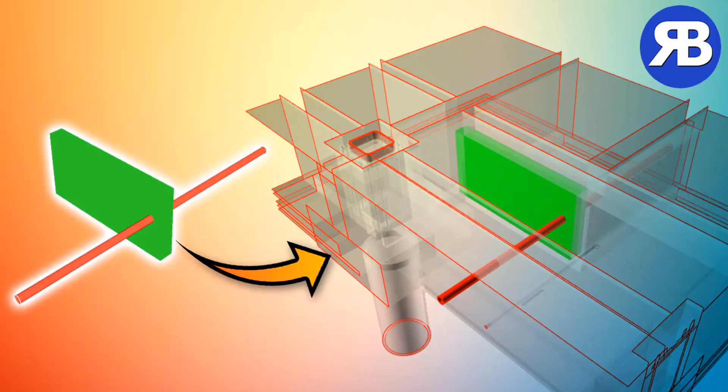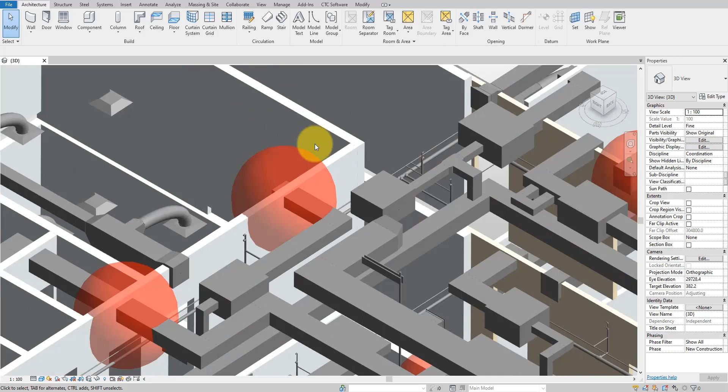Have you ever wanted to mark the location of clashes you found in Navisworks right here in Revit? For example, using these spheres where you can select them, see the clash name from Navisworks, and instantly understand where they are in the model. Well, I will show you today how to do this super quickly using Dynamo. This is what we will create together.

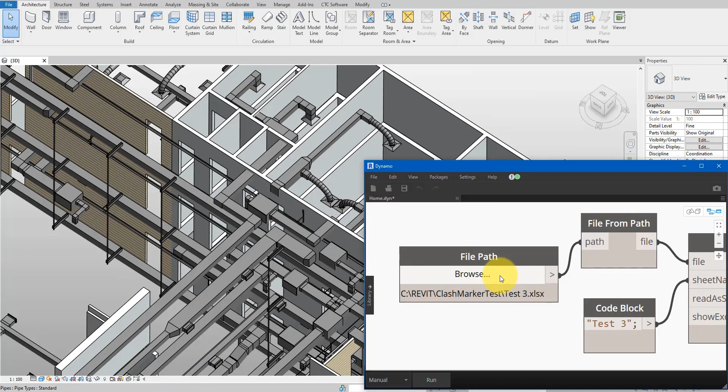For example, I will delete these spheres for now. Go back to Dynamo. Make sure we have the clash reports from Navisworks selected here and run the script. And just after 1 second, I have all those clash markers automatically generated for me. For example, let's pick one of them. Maybe this one here at the end.

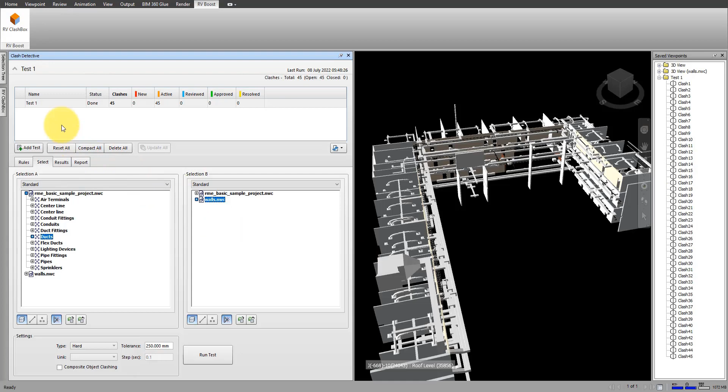This is clash 1. When I go back to the Navisworks model for this project, when I go to the test, go to result, select clash 1. That's the same clash we are seeing now in Revit. To double check this, I can also go to Revit again, back to Dynamo, and then use another script we have for writing XYZ coordinates to the object.

In this case, I have the X, Y, and Z parameters for this marker, but they are empty for now. Let's run this. And now you have their coordinates filled in automatically. If I now return to Excel, and then check out clash number 1, this one here on the top row, I can see straight away these are the same coordinates, so the whole thing works.

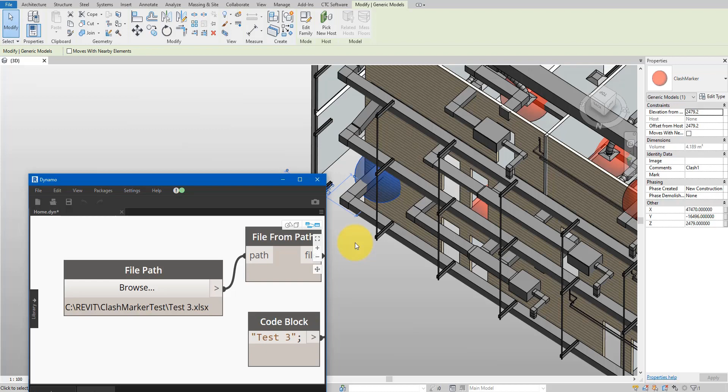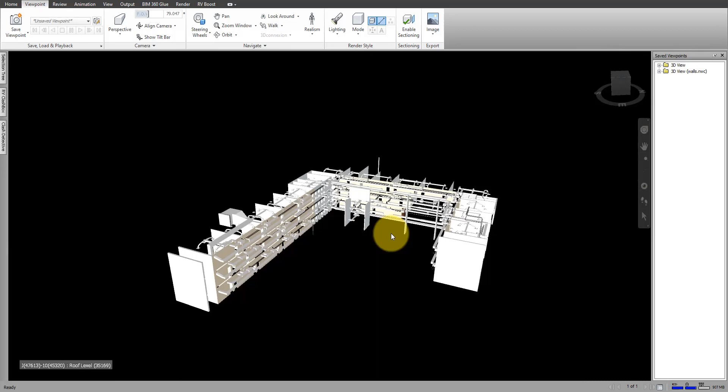Okay, let's begin. We have here the same Revit model from before, which contains MEP elements like ducts and pipes here, along with architectural walls. So now let's see those clashes between ducts, for example, and walls in Navisworks. If I open Navisworks now, you will see the same model in here, and these are the same objects. Let's now run a clash test. Let's go to Clash Detective.

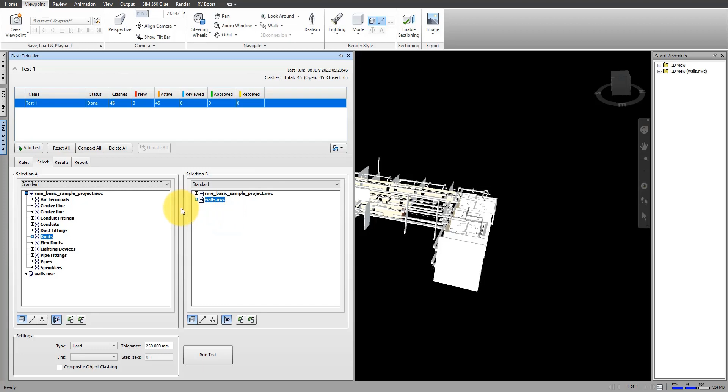I have set up Test 1 already, and this one will clash all the ducts to all the walls. Of course, I exported the walls separately. That's why you see here all the walls are in this one single NWC, and all the MEP elements are in the other NWC up here. Alright, let's run this test. And you can see now it has produced 45 clashes for us. Let's see them in the context of this model. So we have here one of them, another one here, another one there.

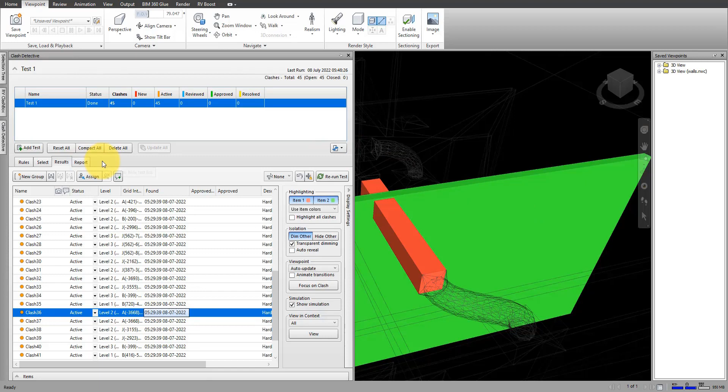Now let's see those clashes in Revit. Firstly, you need to export from Navisworks the clash report. So let's make sure you select the right clash test there and go to report. Now choose the format to be HTML tabular. And in this case, I will export the current test, but feel free to do more, like all tests there if you have time for it. For now, let's do one.

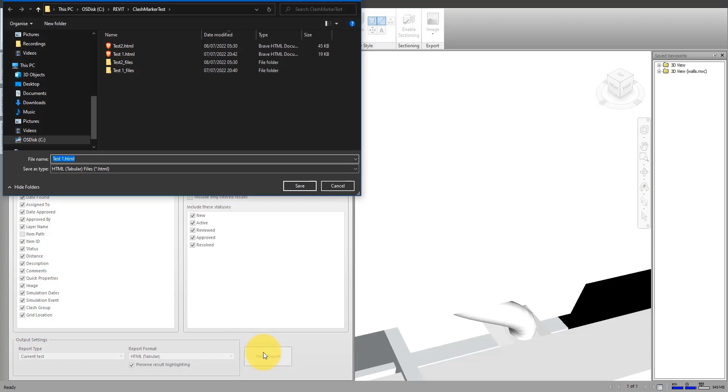Let's choose write report. And you have seen I've done a few tests there already. Let's call this one test number 3 and save it here. Okay, that was quick. I will now open the report in Excel. If you haven't opened Excel yet, now is a good time to do it. Just open a blank spreadsheet like this, and then go to the folder that we exported the report to, select it, and drag it into Excel. So even though that's an HTML file, Excel can read it just fine.

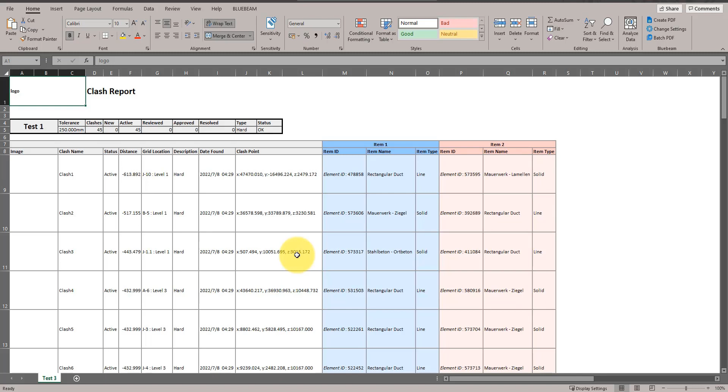In here, there is a lot of information, but for now we just care about two things. Firstly, the coordinates in X, Y, and Z of the clash points, and also the clash name, because in Revit, this will help us identify the Navisworks clash later on more easily. Make sure you know the unit of these coordinate values.

For example, if I go back to Navisworks quickly, as you can see this model here, when I go to Options, Model, or actually Interface, I can select the display unit, and that's now showing as millimeters. So that's how I know these coordinates should be in millimeters as well. All right, let's open Dynamo and start scripting. I will go back to Revit.

Open up Dynamo here. I've already done that for you. Let's now make a new definition. Firstly, of course, change the run mode to manual. And now we can start adding some first nodes. Let's start by bringing in the information from Excel.

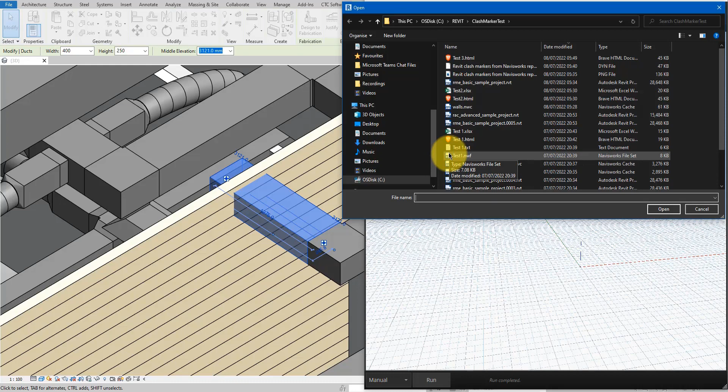So I would type File Path. Click here, select the Excel file in the window, and then open it. Moving on, we can do File From Path. Connect it here to get the file. And then, of course, we should do Read Excel or Import Excel. Get the file to there.

It needs to have a sheet name as an input. So let's see what we should give it. In this case, I will just copy this text down there, which is test3. Go here, define that as a string, and connect it to sheet name. We can now run this. And very quickly, you can see now we have all the information from Excel.

But that's a lot of noise, so let's filter out just the coordinates and the clash names. We can do GetItemAtIndex without a space. The data will be going to list, and now we need to know the index of the column for coordinates. Super easy. I normally just go to Excel and type in a few numbers starting from 0, 1, 2. I can now drag this over so I get the right column indexes. So now as we can see, this column here for clash point coordinates is at index 9.

Let's go back to Dynamo and define the column index like this. When I run this, you will see the index has given me all these coordinate values. Or has it? We actually forgot one step. We should go to list here and use levels. Let's try with level 2. Okay, now that's more like it. We have coordinates back. However, these are not only coordinates. We also have empty cells and cells for titles or text.

Let's filter them out. Firstly, let's clean up the null values. So let's do IsNull. Get them to here. And then we do a Boolean mask like this. Connect to there, and then use the mask to filter out for the coordinates only. If I expand this, you will see the in list is what we don't need because these are nulls. We need values from the out list. However, in the out list, I still have text. So let's remove them as well.

Let's do String.StartsWith. Get the out values to string. And now we need to search for the prefix we want the valid strings to have. In this case, the prefix will be x and then colon, because that will begin a valid coordinate string. So I can now do x colon, search for that text here, and run it. Now we have a list of trues and falses.

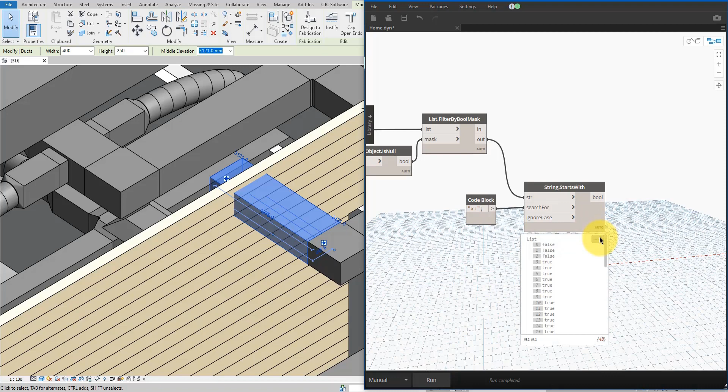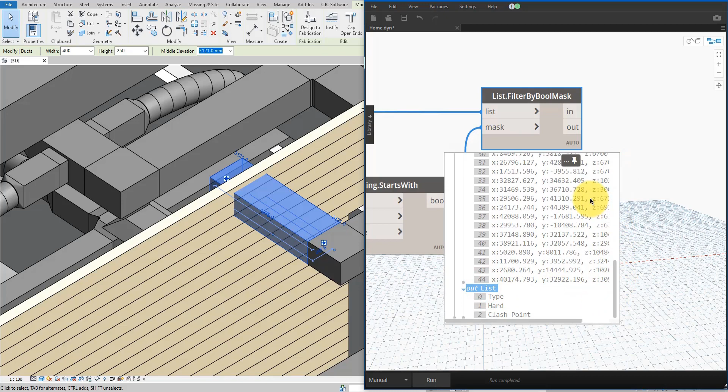Let's do another Boolean mask here. Connect the out list to list and use this new mask. Run this again. And you can see now in the in list, that's exactly what we need, all the coordinates as strings. We can now discard the out list, so everything works to this point. Next thing to get from Excel will be the list of clash names. So going back to here, we need to get the clash names.

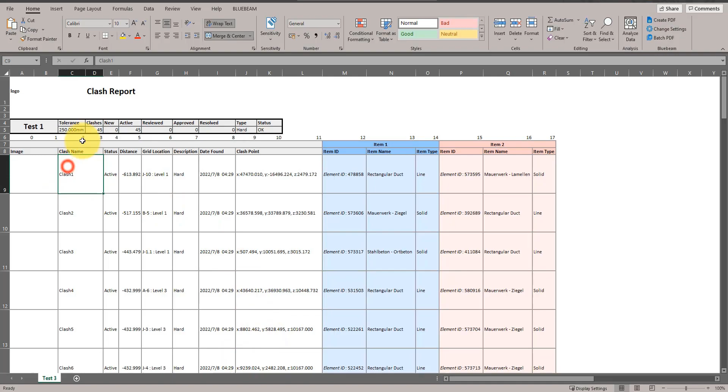Let's do another GetItemAtIndex. Paste it here. And what's the index of the clash name column? Let's check. That will be index 2. So we know what to do now. Change the number here to 2. Run this. And yes, these are clash names. Now we need to filter this list using the same Boolean mask up here that we did for the coordinates. Super easy. I can just copy this node down, change the list of input items, run it, and now we have all the null values filtered out for us.

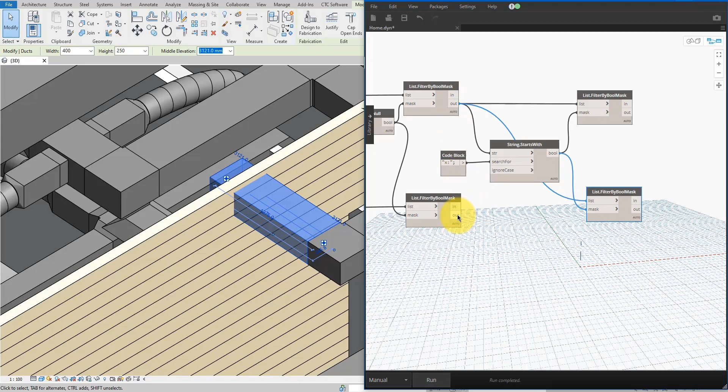Let's now do the second mask here. Copy this down, and use the out list, just like what we have up there. Use the out list, not in. And now if I run this, I will get all the clash names that are valid.

For now, I will just turn off the background grid there. That bothers me a little. Let's move it down here so I don't see it anymore. And now we're good to go.

The next step is to obtain the individual x, y, and z coordinates from this string. We know they are the right data, but they are not yet in the right format. So let's change that. Let's firstly do ToNumber. So we are converting all those strings to numbers, like this. Actually, before doing that, we need to split it first. So let's do String.Split.

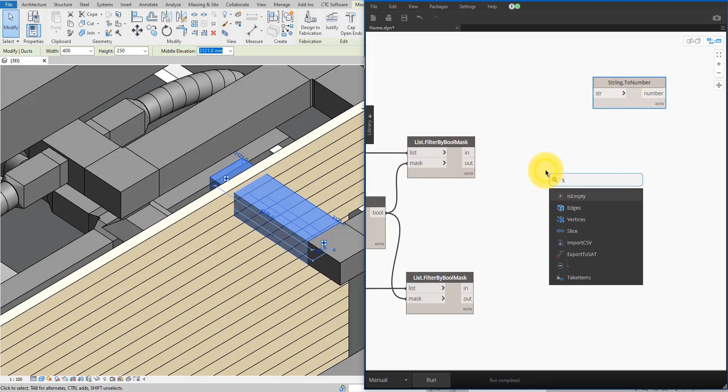Okay. Now for the separator, we can define 3 of them. So let's do additional inputs. And now the first separator will be x. Next one is y. And then we have z, all followed by the colon. And now that will be separator 0, 1, and 2. Let's see what we get.

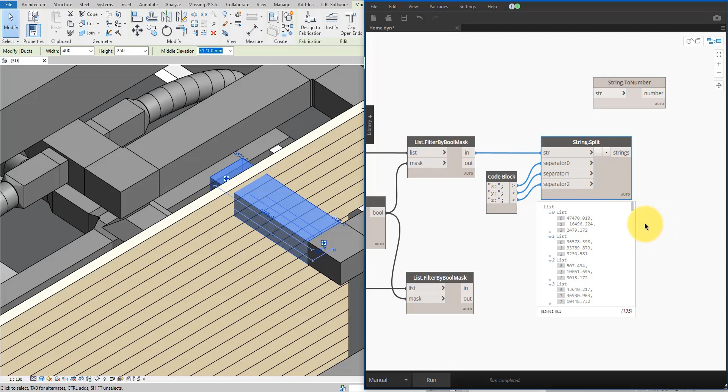Okay, that looks fine. We can now have x, y, and z for each clash. Even though they still have the comma at the end of the coordinates, let's change that. Let's add the comma here and the comma there. Try this again. Now that looks good.

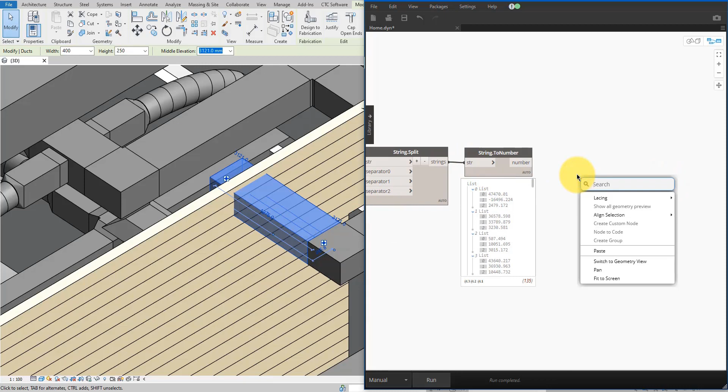It's time for us now to convert these strings to numbers. Let's see if that succeeds. Yes, it does. Now we have all these numbers looking very similar to the strings, but now they are of the right data type. Next step, we don't want to create the clash markers individually, so let's transpose this list. Let's do transpose, like so. And then you will see what it does.

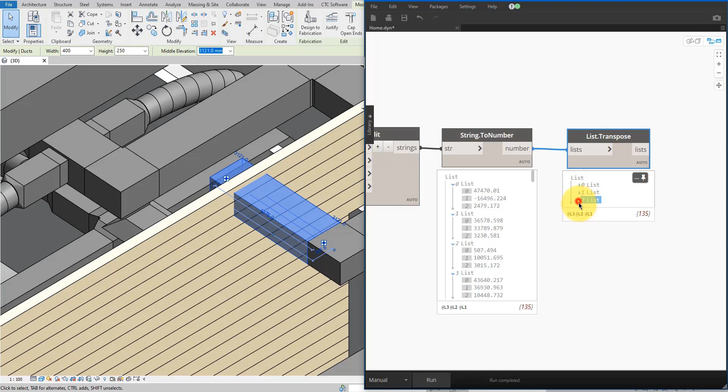It collects all the x values from these sublists into the first item here, which is list 0 for x values. Then you have the same for y values in the second list. And then the last list is for the z values. So that's really good. Now I want to explode these 3 lists into individual inputs to my next node.

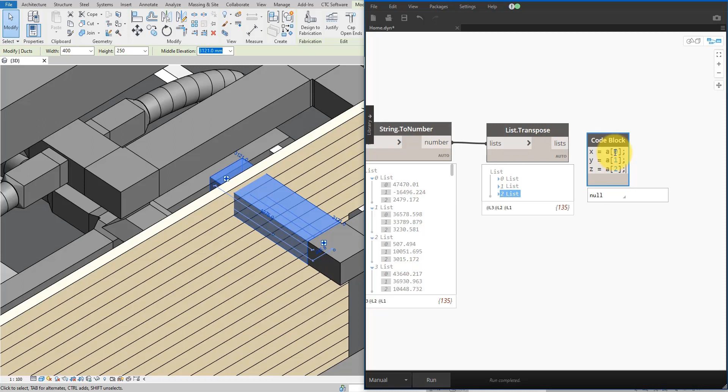So let's do a quick code block here. So let's say x is list a at index 0, y is list a at index 1, and z will be also list a but at index 2. Just a way for us to get the x, y, and z lists as individual items. So now I have preview here just the z list, but we know that x and y have also worked.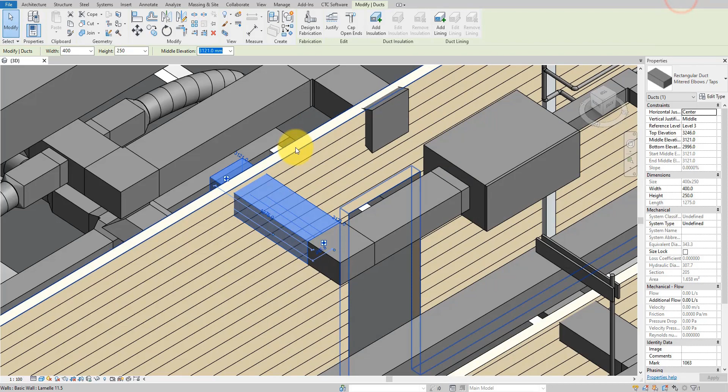Alright, moving on, we need to ensure one thing exists in the Revit model. It has to have the clash marker family. If you remember, that's the red sphere that we copied around to show the clashes locations. I have already loaded it into here. So let's see if I go to component. That's the clash marker there.

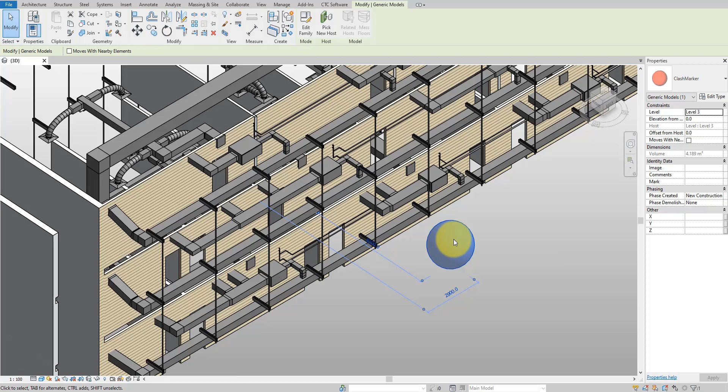This is from an external family I have loaded into the model, but don't worry, if you haven't got something you can use, just follow a link in this video description to download this family and then use it straight away. Essentially, it's nothing more than just a solid sphere with a red transparent material. So we can still see everything behind it, like this. Okay, let's make a note now of its family name. The family name is ClashMarker.

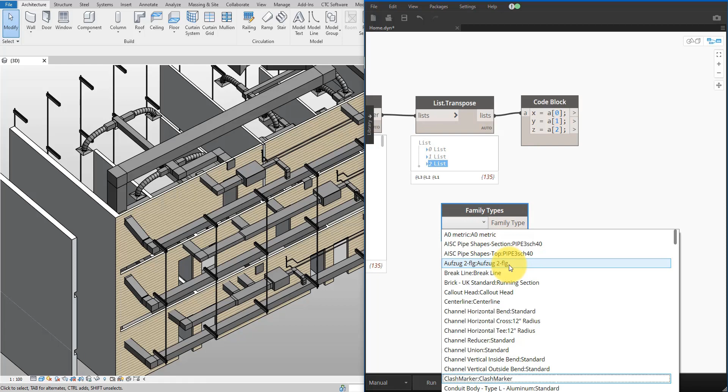So we can now go back to Dynamo and define the family type here using family types. This is an input node where you can select ClashMarker from the list. It's there. If you don't see the name ClashMarker or the name of your custom family you want to use, make sure the family is loaded into the model. Otherwise, the name here wouldn't show up.

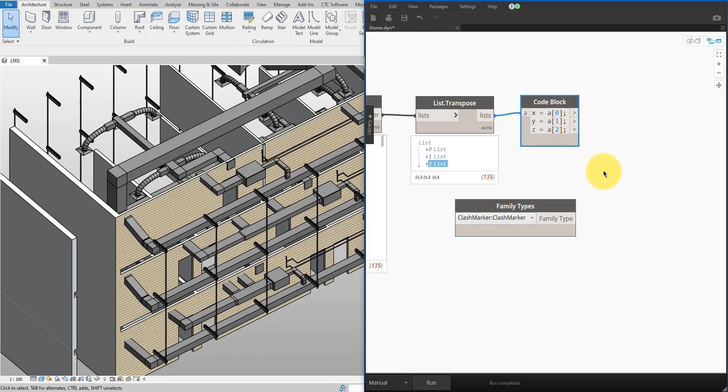Alright, so at this point, we have all the inputs we need for the next step. We have the coordinates of the clashes. We have the family we want to use to mark them in Revit. And also we have the clash names coming out from this node there. Now, to start placing the markers, we can use a bit of Python to make the process as efficient as possible. Let's drop in here a Python script node.

For now, I will do Python script from string. And now we give it a few inputs. So let's do for x, y, and z, followed by the family type. Now, it's the usual thing I normally do in my tutorials. Let's make now a way for Dynamo to read a text file that contains a Python script. We can then use the text from that file as a script input for this node here, and then it will just run the Python script that we have in the text file.

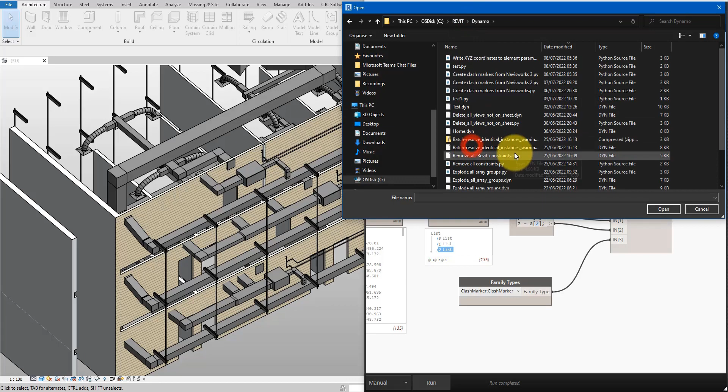All right, let's start giving this Python script node here the script file that it needs. Let's do another file path node, and then select a Python script file I will use just in a minute. That is called test.py. And then similarly to before, we can do file from path. But this time, instead of read Excel, we just do read file as text. That will give us a string. I can now connect the string to here.

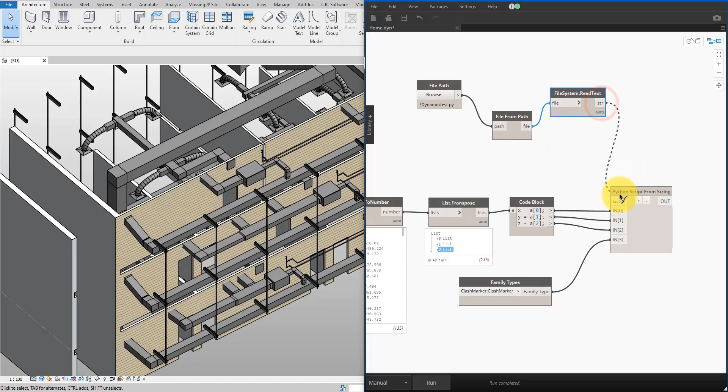And now the next step, we will go into Visual Studio Code, my favorite Python script editor for Dynamo. If you are new to this kind of workflow, don't worry. Just go down to this video description and use a link there to see my basic video tutorial on how to script things in Dynamo this way.

It will also show you how to set up and use Visual Studio Code, because this is really the best editor you can have for writing Python script to use later in Dynamo. The video will also show you step by step how to create, understand and use this Python script template that I have opened already. So that should give you all the information you need to then come back to this video and follow me from here. Okay, let's start scripting here.

To begin, we need to get the project location from the active model. So let's call this one project location and say that should be doc.ActiveProjectLocation. Next thing to do, we need to get the position of the internal Revit origin point in this shared coordinate system, which is what this command returns here. It returns the current active shared coordinate system being used in your Revit model.

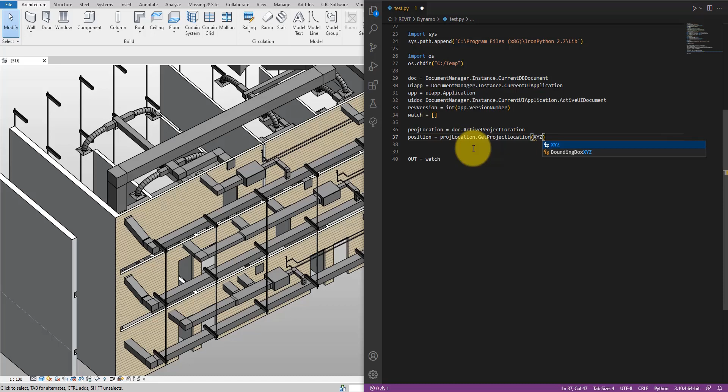So to get the position of the Revit origin point in this shared coordinate system, we should call position equals project location dot GetProjectPosition, and the origin point will be at XYZ.Zero. Let me show you what that means.

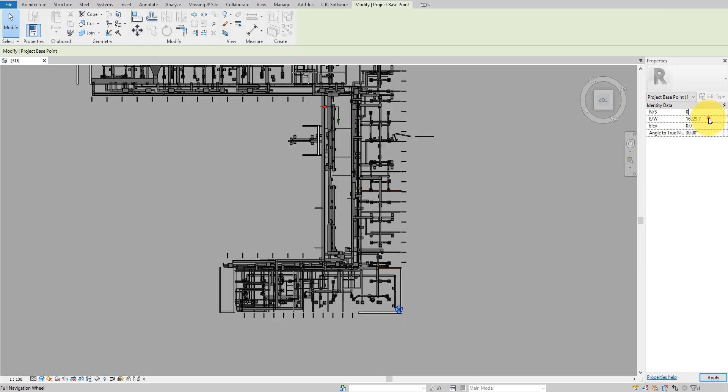If I now go back here and then turn on site components, which are project base points and internal origin point, let's see where they are. Okay, so this one is actually not overlapping the internal origin, which is there. Let me move it there. Let me change these two values to 0 and 0. And now you see actually the origin point in this case is not where the model origin point is.

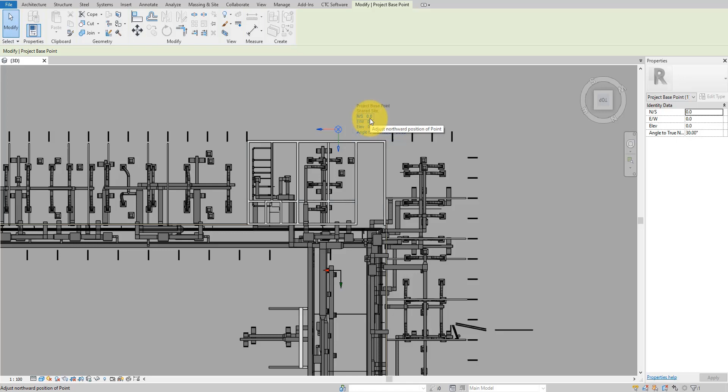As you can see over here, we have the Revit model 0,0,0 origin point. This 0,0,0 point is different. This is the origin point of the shared coordinate system. So now if I try instead to move this point to where the model origin point is, you can see now it has some x and y coordinate values. And these values are the ones we are trying to get using this command here.

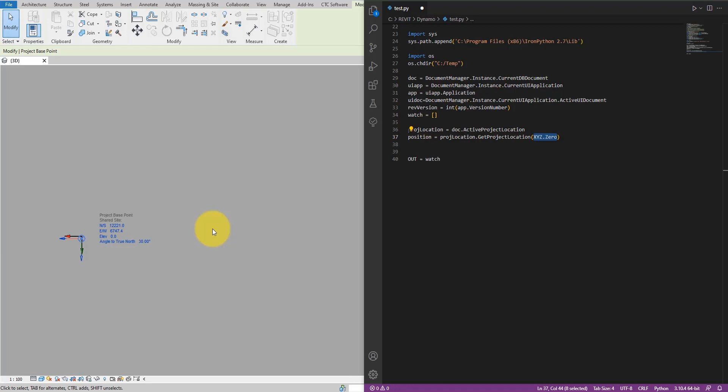Essentially, we are saying, yes, we understand that the Revit origin point, which is XYZ 0,0,0, will have all three coordinates equal to 0 in the context of this Revit modeling space alone. However, a shared coordinate system, especially once you have set it up to connect different Revit files and Revit links, has a different origin point. And we saw that point previously when I tried to move the base point to 0, 0 by changing the northern and eastern coordinates here. We saw clearly it's not the same point as the origin point.

So here we are trying to get the coordinates of the Revit modeling space origin point in the shared coordinate system. You will see in a minute why we need it, but that's the first step we need to do here. Okay, next step, let's bring in the inputs from Dynamo into Python. So let's see what we have here. We have X, Y, and Z as input 0, 1, and 2. Let's define that here now.

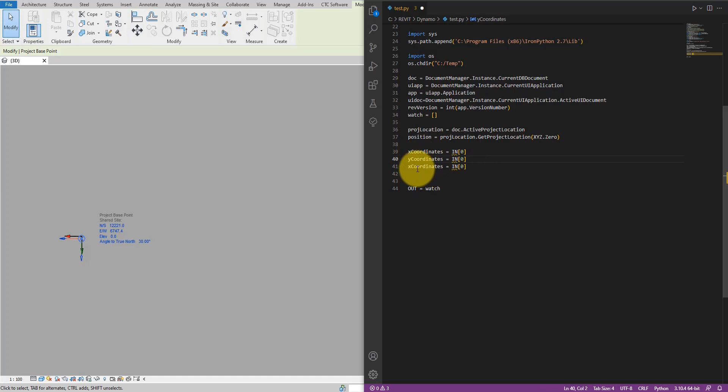We can say X coordinates equals to IN[0]. And then if I do the same for Y and Z, I should then change the number here to 1 and 2. The next input we have was family type. So let's say fam type should be input number 3, exactly as it shows in the Dynamo graph.

However, with family type, we need to do something extra. We need to call UnwrapElement and it will convert a Dynamo object into a Revit object. We need the family type to be a pure Revit object so we can use it later on in creating the clash marker instances. Whereas if we just use IN alone, that won't work because IN is actually the Dynamo wrapper around the actual pure Revit family type object.

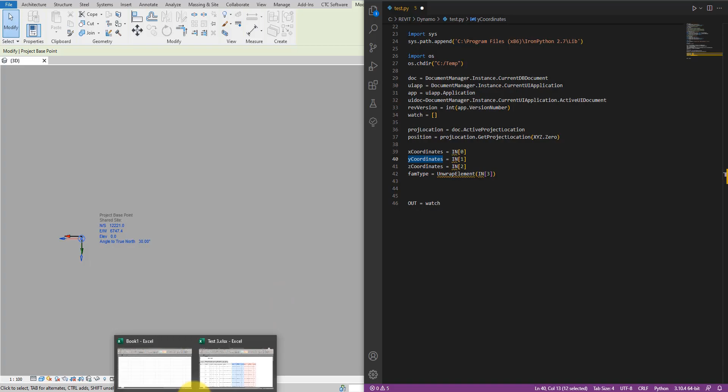Next step, we need a way to convert the X, Y, and Z coordinates here from millimeters to Revit internal units. Remember, we got the coordinates from Excel and we checked in Navisworks that these are millimeter values. That's fine to see in meetings and Revit windows, but for using them to create Revit objects, we need to use the internal Revit unit system. So now we need to have a way to convert these values to feet and inches. The good news is I have defined that function for you already. So let me just paste it here.

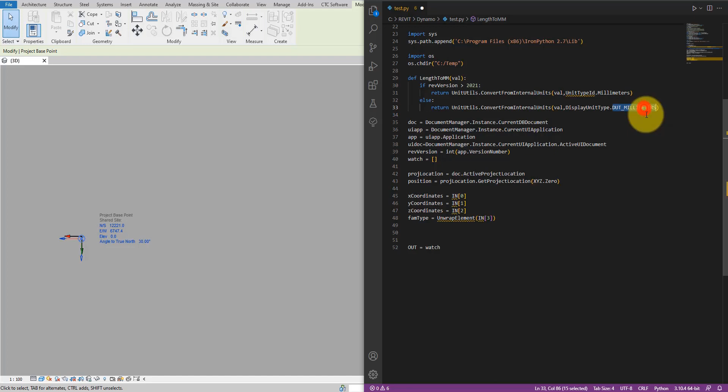Essentially, this function is called length to millimeter, and it simply checks the Revit version. If it's greater than Revit version 2021, then it's going to use this method for converting the value from millimeters to the internal unit. Otherwise, it will use an older unit conversion method in the Revit versions before 2021, but still it does the same thing of converting millimeter values to the internal unit value. So with that definition in place, I can now go down here and say I want to have X values. This will be in the internal unit.

And I can say length from millimeters. Actually, this name is wrong. Let me change it first. Well, that reminds me that this method needs to have a counterpart. So instead of converting from internal unit to millimeter, I actually need to go the other way around. So let's say from millimeter there. This method will convert from millimeter to internal unit. And this one will convert from internal unit to millimeter. Very easy to get confused there.

But anyway, with this one, we can say convert to internal units. And the same here. Okay, and now I can call length from mm down here on the value. And that value will be from X coordinates. So here we have a quick way to construct a for loop. We're looping through value in the X coordinates list up there. And for each value, we convert that into the internal unit from millimeter to internal. Let's do the same now for Y and then Z. Make sure to change the name here at the end too to Y and Z coordinates.

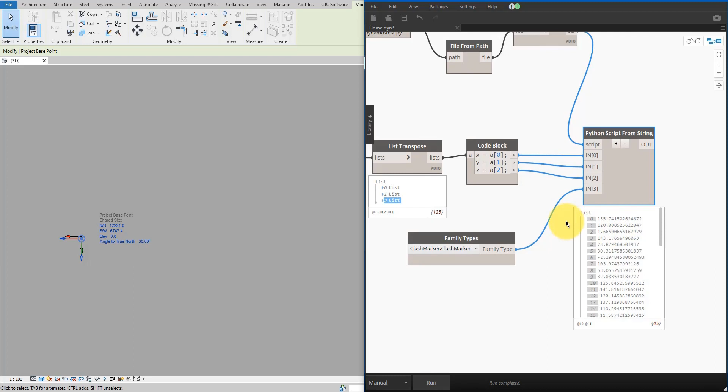Let's now double check the output. So I will now save this, go to here and run this. Oops, there's an error because I used the wrong method name. Let's go here. This method name is wrong. Let's change that to position, not location. And run this again. Now that's working. I can see these are the internal unit values corresponding to the X coordinates in millimeters from my Excel file. So we're good to go.

Next step, we can start creating the transaction for generating the clash markers in Revit. Before doing that, I need to make sure all the other transactions in the model have been closed using this statement here. This is something available from Dynamo. It makes sure that any transaction still open will be closed, even forcefully if needed. So with that done, I can then start a new transaction myself using with transaction on this active Revit document of the name, let's say, generate clash markers. And say that will be stored in a variable called CR. I can now start CR. And also, don't forget, I need to also commit it at the end.

Now, within the context of the transaction, I can do certain changes to the model. For example, I can do family type dot activate. This is because sometimes a family type is not activated, and that means it cannot be used for making Revit elements. We need to now activate it first to make sure that's available. Next step, I can open a for loop here. Let's do for X, Y, and Z values from the other three lists that we defined previously. That would be X values, Y values, and of course then Z values. So here we simply use the zip method to loop through all these three lists up here at the same time and store their current values into X, Y, and Z.

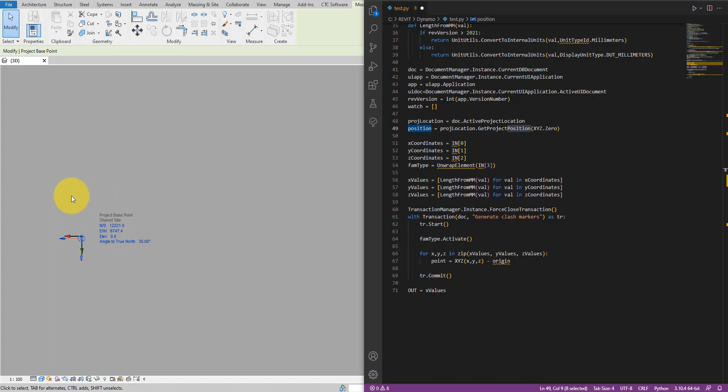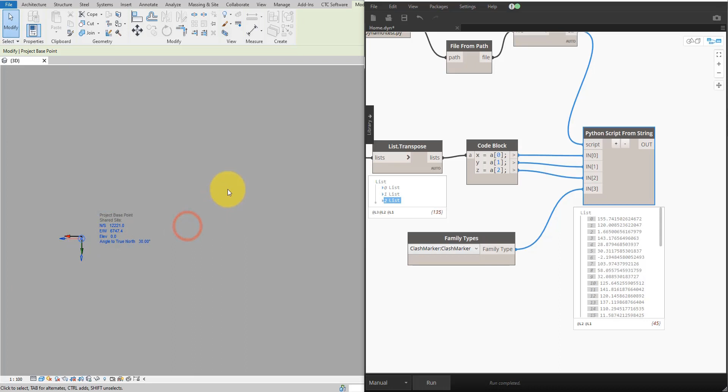So here, remember, we have the X, Y, and Z coordinates of the internal Revit origin point in the shared coordinate system. However, the origin point's X, Y, and Z values are still stored in this single variable called position. So let's say X origin equals position dot east west. That's simply to say we want to get the property that is east west here, or E/W in Revit. That will be the equivalent of the X value of this point. The Y value we can get from the north-south property of the same point here. So going back now to Python, I can do Y origin will be position dot north-south. And then Z origin will simply be the elevation of the position point. So we can say position dot elevation.

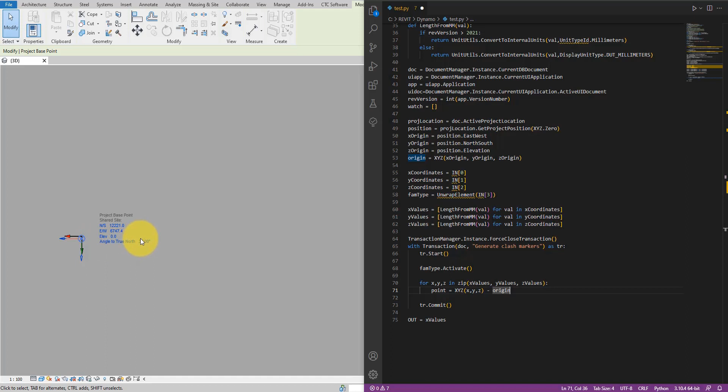I can now create the origin point object as a new XYZ instance. And I will take X origin, Y origin, and then Z origin as its required coordinates. You can see now that is defined, which means I can use it here. However, there's something we haven't done. We haven't taken into account the angle to true north value. In this case, that's 30 degrees. That value I can also get from the position object. So let's say angle to north, or to true north to make it extra clear here. That should be position dot angle.

The reason for getting this is that after we created this point here, even though it has the right coordinates in relation to the origin point, this one here, we still need to rotate it using the angle to true north to make sure this origin point will be exactly where the clash point is. To do so, to rotate the point around an origin point or an axis, in other words, we need to create something called a transform.

For the transform to be defined, I need to firstly create a rotation axis for it. So let's say axis should be Line.CreateBound. Simply a way to make a line between 2 points. The first point will be, of course, the origin point we have made. And then we need to have a point directly above it, just so the axis line will be vertical. I can quickly do that by using origin plus XYZ.BasisZ.

BasisZ is simply XYZ 0, 0, 1. So this point here will be exactly 1 unit above the origin point. And then by connecting these 2 points, we have a line that is perfectly vertical, even though it will be a very short line. That's fine. And then we can define the transform. Let's call it rotation transform. And we can say that will be Transform.CreateRotation.

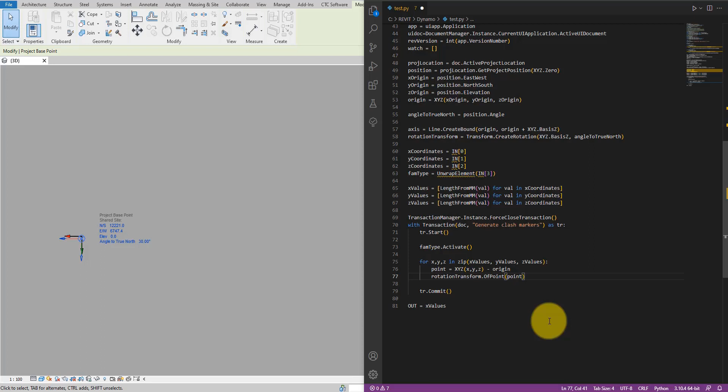For the axis of the rotation, I can do XYZ.BasisZ. And the angle will be, of course, the angle to true north that we have obtained up here. Now, with the rotation transform object ready, I can use it down here to rotate my point. Let's do rotation transform.OfPoint and supply the point we have made on the previous line. Of course, after rotating the point, we also need to reassign the new point to the previous variable. So let's do it like this. Just so this point here will actually get the new value that should come out from rotating it.

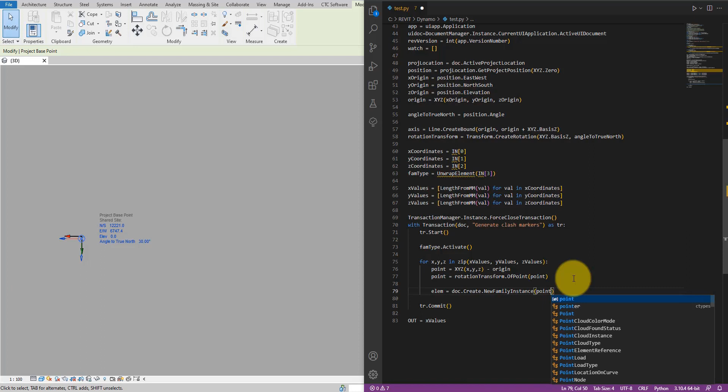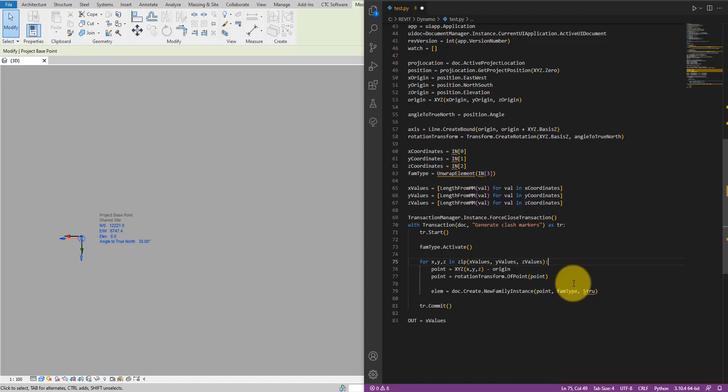Okay, so now with the location point ready, we can start creating the clash marker. Let's call it element and say doc.Create.NewFamilyInstance. Now we need to supply the location point that we have now, followed by the family type, and then followed by structural type. Structural type is just a way to say if the family will be a structural element. To get it, we need to import the Structure namespace that we have done up there. Let's now go down here and say StructuralType.NonStructural, because obviously the clash marker is not a structural element.

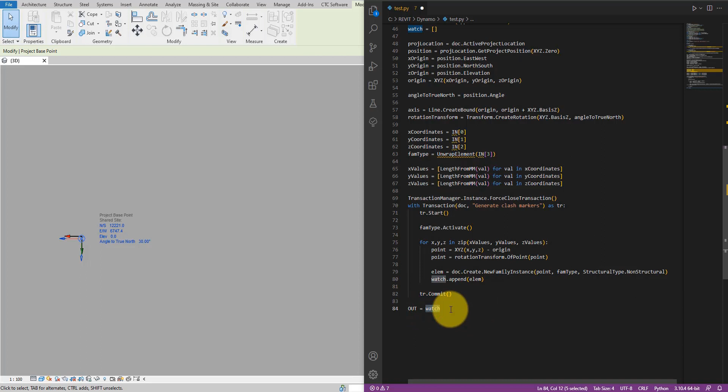Finally, we can append that element to the watch list just because I want to see them at the end outside of the node, so I know exactly how many items have been created during this process. Okay, let's now save this. Go back to Dynamo now and run it. Wow, that works on first try. It's really good. Let's see what it has created here.

So, lot of clash markers, but seemingly in the wrong place. We know the location works because they seem to be relatively in the same kind of position together. So the thing that's gone wrong must be the angle. Let's go back to Python now. And I have a feeling, just from experience, that the angle probably needs to be flipped. So now instead of position angle, let's put a minus here. So we rotate the objects using the same axis, but in the opposite direction. So we're gonna save it and test it out.

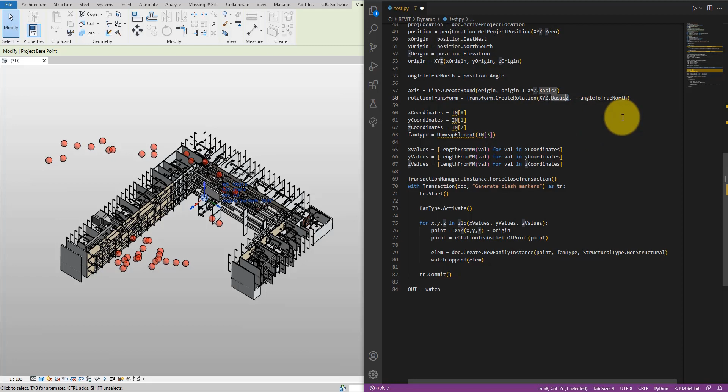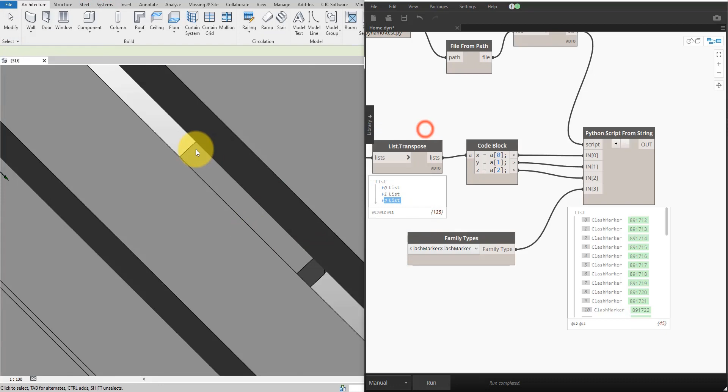Now that has worked, I know, because I can see the bubbles or the spheres inside the building now, but it didn't clear out the previously created spheres, so let's undo twice. You can see there are two instances there with the same name. Now the model is clear one more time. I can now close the script, go back to it, and rerun it. Oops, something's wrong at the beginning there.

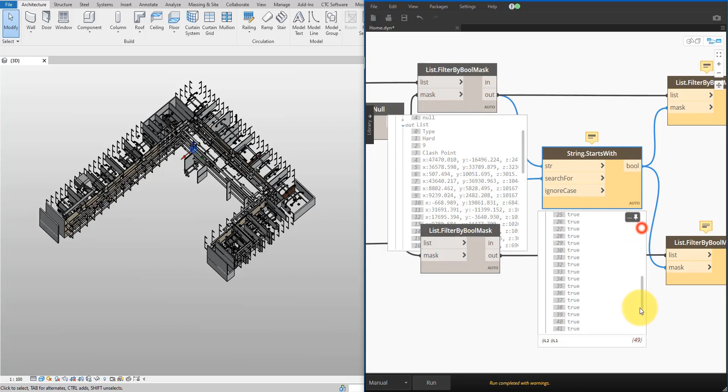So the error is here. This node was asked to convert a non-convertible type. Let's see what that has done to here. So you can see there's a null value, and that's where the trouble is. The null value is at index 2, and that's number 9. So here it's trying to convert a number to a string just so we can do the StartsWith check, and that won't work. So we need to somehow make sure in this list here we only have strings. Maybe we need to do String from Object first.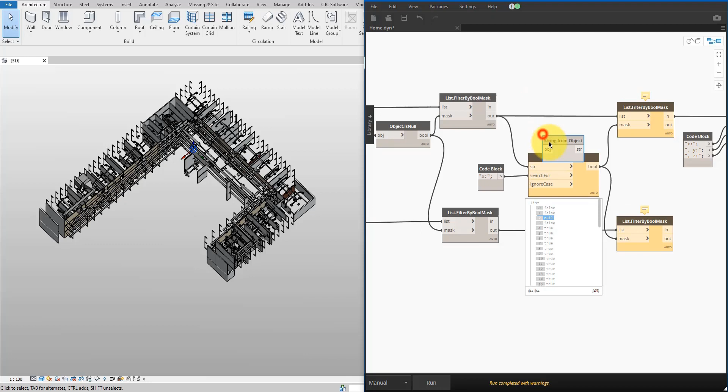Like so. So instead of going directly from here to there, we need to go through this node, string from object, and run this. Here we go. So that fixes it. And the good thing is now we have all the clashes inside the building. That's a good sign. Anyway, there's one last thing that we missed.

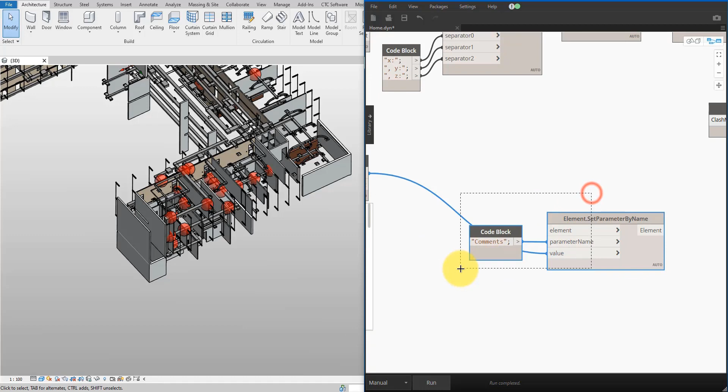We didn't assign the clash names from this list here to the spheres. So let's do set parameter by name. The value will obviously be these names. Parameter name, let's try comments for now. Of course, feel free to use your own parameter name, but it should be a text parameter for it to work safely. And now we can get the list of items created by this Python node, like this. Let's try it now.

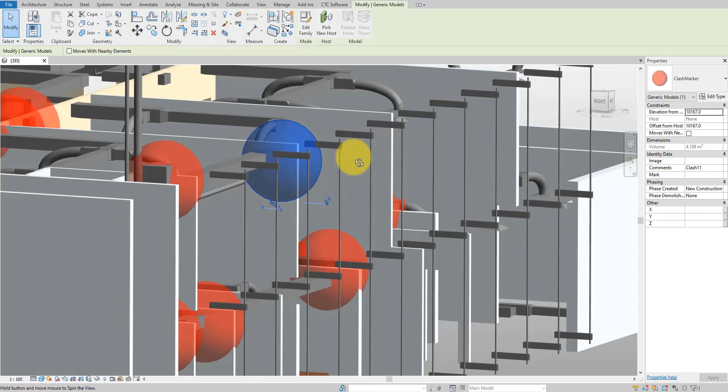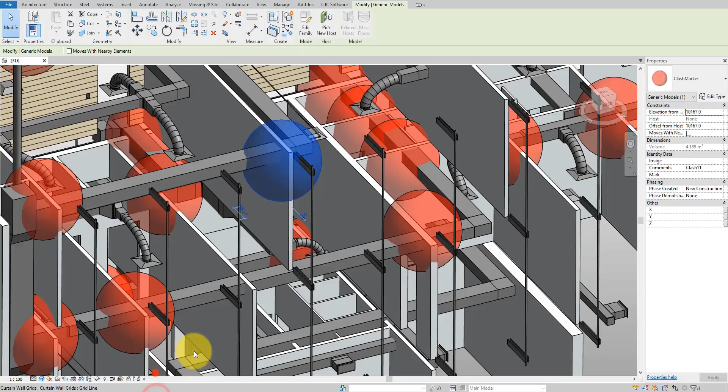So that's done it. I can now go and check in the model. If I now select this sphere, for example, that's right on where the clash is. Very nice. And I can see the name is clash 11. That means I can now go back to Navisworks, open Clash Detective, go to results, and see clash 11. Clash 11 is this one. And of course, as you can see in the background there, this clash is exactly the same thing I am seeing now in the model. It's right there. Very nice.

Last thing to do is to make sure we don't rely on this Python script text to make the script work. So let me go here and do Control A, Control C to copy. Back to Dynamo. I can now drop in here a proper Python script node. So this one. Double click to open it and paste it here. Now I can replace this one with this new node. Let's make sure all the inputs match. So transfer them like this, including the family type.

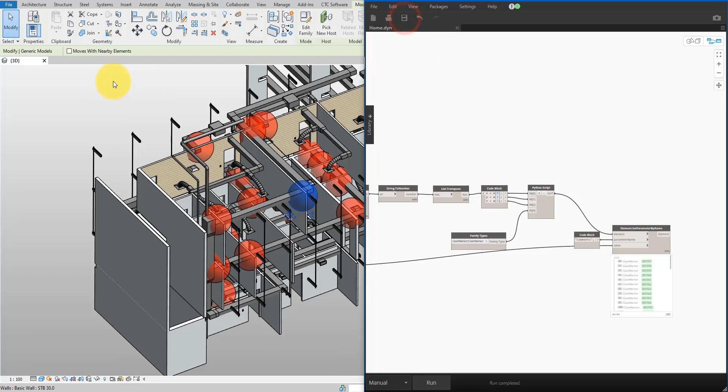And then of course we need the items to go into element set parameter by name. I can now delete these nodes there and use this single one from now. Let's double check. I will save the script, undo the transaction in the model, and now see if it still works. Let's run this, and it's done it.

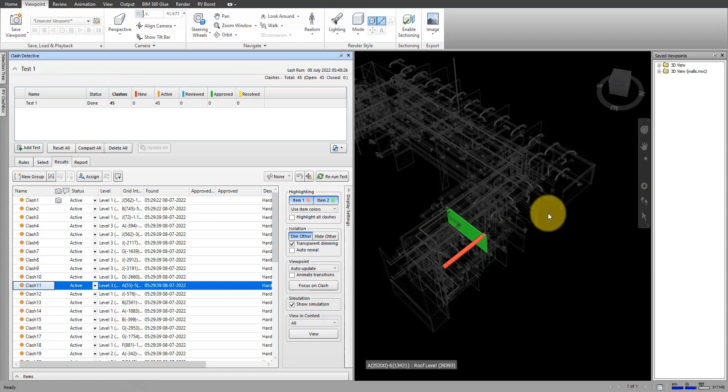Anyway, while on the topic of seeing clashes in Revit and Navisworks, there's also a good way to see them in Navisworks too, because usually the reason we want to go back to Revit is to have a clearer view of the context of the clash. For example, in Navisworks, if you have a big building with billions of items, it will be super hard to see a clash like this in the context of other elements surrounding it. So one way is to go back to Revit using the Dynamo script we built today and inspect the clash markers to see the context better.

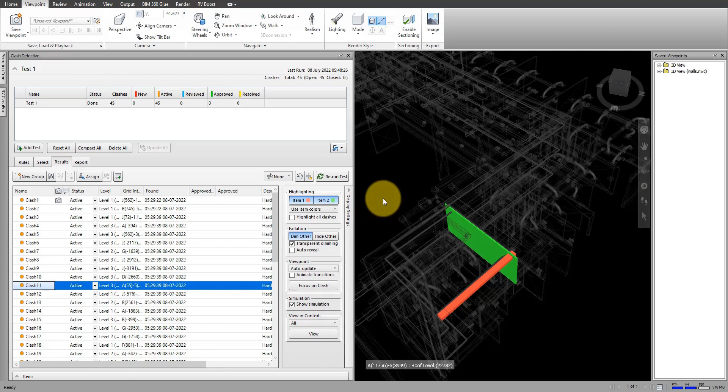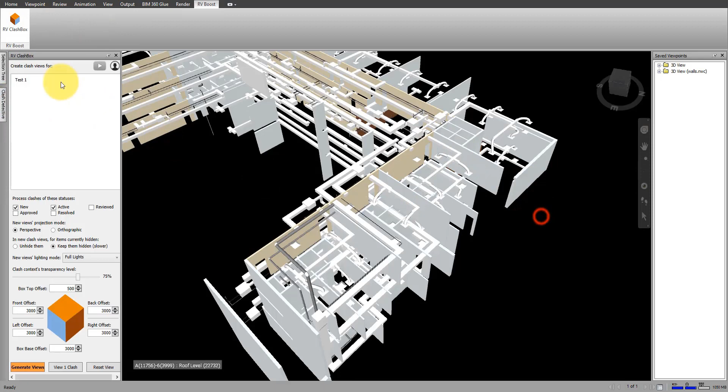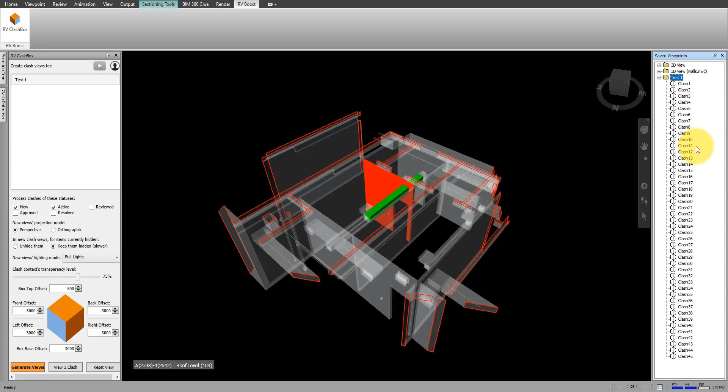Let's open it. So here I have the same clash test that I can see from Clash Detective. That's one there. If I now select it and click on Generate Views, it has very quickly generated for me all the views that show the context of each and every clash. All of them are now saved under Saved Viewpoints in a folder of the same name as the clash test. And now I can go to clash 11. That's the same clash we were inspecting in Revit just now, in this area there.

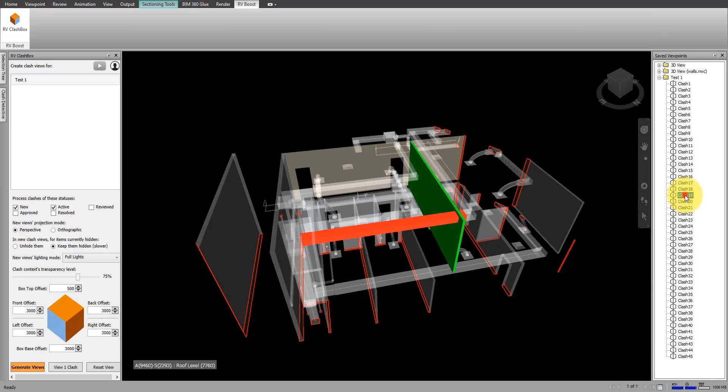But now instead of going back to Revit and doing all the scripting that could be time consuming, you can just do it in Navisworks using this plugin to see this clash in the context of the coordination model. You can also see other clashes like clash 19, clash 30, and so on. That's a bit quicker, but also in my experience, lighter to use, because the Revit model will almost always be heavier to navigate and work with than a Navisworks file. So, just another option for you.

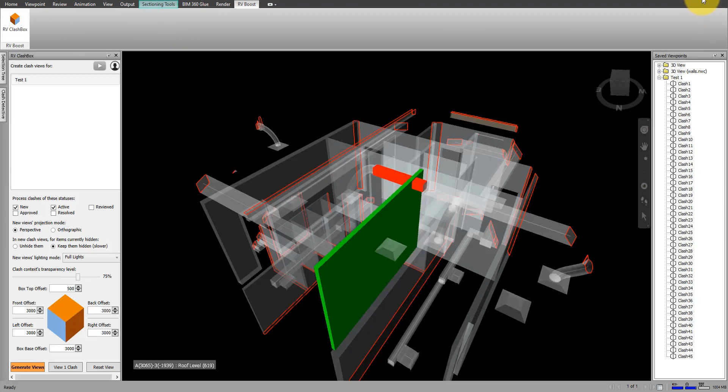Otherwise, if you still prefer to review clashes in Revit, the script here can work to save you a lot of time by generating these clash markers in a few seconds.